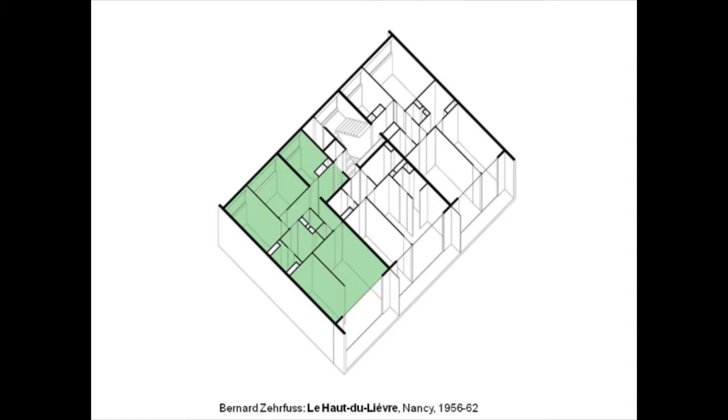Now, Frida and Jose, right? A little birdie told me that some of you are flat hunting. If this is so, let me be of some help. I have just the flat you are looking for, with an admirable orientation, well-lit rooms, cross-ventilation, and no inner patios. What more can one ask for? The flat I have to offer you has 3 bedrooms, with no space lost to corridors, and a generous balcony.

Wouldn't you like to live here? Frida? Yeah? Yeah, Jose. Yeah, well. Now, let me show you what your building looks like.

And here you have it. A housing estate in Nancy, France, by the French architect, let's see, Bernard Zehrfuss. Yeah, I don't know, this is not French. He's one of my French students. Well, thank you. Well, Bernard Zehrfuss, containing 3,388 dwellings, based on the aforedescribed rationalistic criteria. Flats capable of housing all the students and all the teachers from this school and many, many more. We could live together. Well, this block is 400 meters long, and it's one of the longest blocks of flats ever built in Europe.

Would you like to live here, Frida? Yeah. Jose? I don't know. Please say no. Would you like to live here? No. Thank you. Why not? What defects do you find in it? What don't you like about it? Its monotony, perhaps? Do you think it's unattractive?

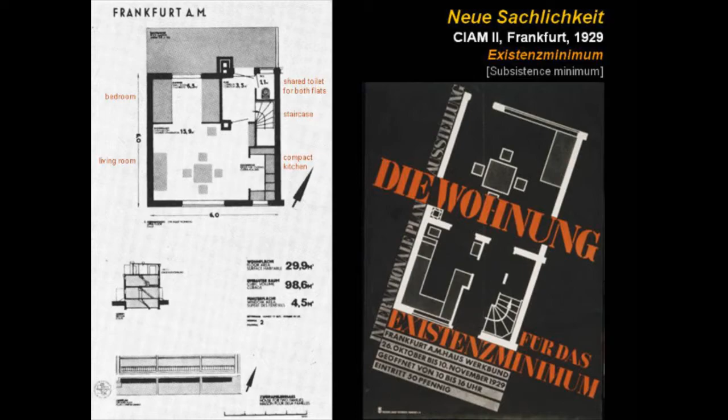As you know, as you should know, at least my third-year students, the block of flats first came into being in Germany in the 1920s, when the economic situation was in dire straits and an urgent solution for the serious housing problem affecting a large part of the population was required. For which, Daniela, where are you? Daniela? Here. For which the architects of the Neue Sachlichkeit, the new objectivity, proposed the concept of Existenzminimum. Existenzminimum. The minimum subsistence dwelling.

In this case, it was 30 square meters. Well, it was an economical proposal which fulfilled the necessary hygienic criteria of the day, and thus ensuring dignity for its dwellers. Dignity. This was the key word. This economic and efficient solution was defended by the architects of the modern movement.

And following these examples, the housing block spread with great success throughout Europe during the 50s and the 60s. Some with better luck, others with worse. Your flat, Frida, that is the one I am about to sell you, is just an example of these blocks of flats. And you must remember that this housing block concept was the solution to the precarious housing problem that many people were suffering. And I have a shocking image now.

Now look, this is how people lived in Calle Riera Blanca, in shanty towns in the 50s, in the heart of Barcelona. For example, the very same French precast concrete panel company we saw in Nancy built blocks of flats in Bellvitge and L'Hospitalet, along the lines described before.

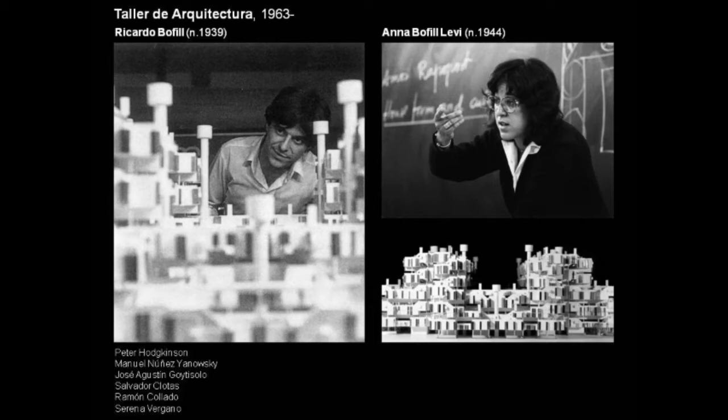It was in this context that the young Catalan architect Ricardo Bofill led a group called Taller de Arquitectura, or the Architecture Workshop, which proposed bold solutions in order to overcome the inherent banality of the block of flats. Taller was a multidisciplinary office where architects like Anna Bofill Levi, Ricardo's sister, Peter Hodgkinson, and Manuel Núñez Yanowsky worked side by side with the poet José Agustín Goytisolo and the manager Salvador Clotas.

It was Anna Bofill Levi, the poet José Agustín Goytisolo, and Manuel Núñez Yanowsky who devoted most of their time to research new methods to nurture the taller with new ideas, under the firm conviction that a new and better architecture was possible.

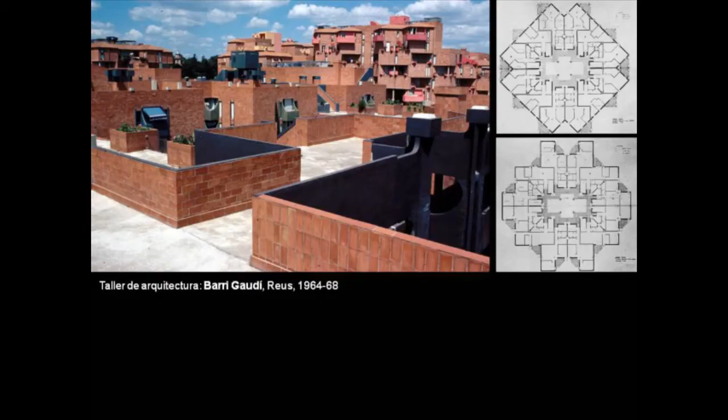Now let's briefly review three projects previous to Walden. In the Barri Gaudí housing development in Reus, using straightforward geometry based on a square plan but rotated 45 degrees and trimmed, volumetric variety and an interesting series of terraces are generated.

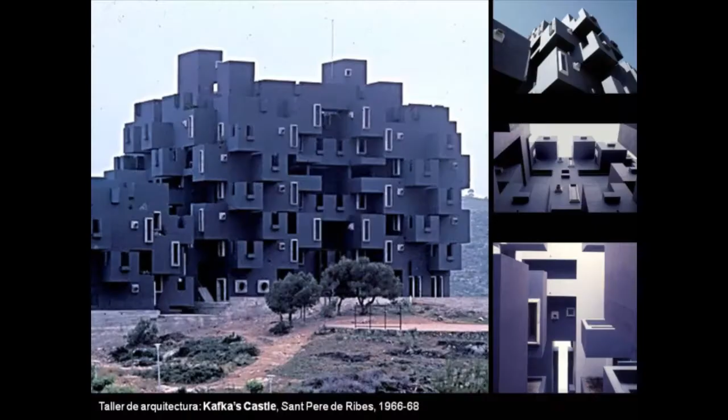In Kafka's Castle, in Sant Pere de Ribes, near Sitges, the housing modules are arranged in a helical form that reminds one of Safdie.

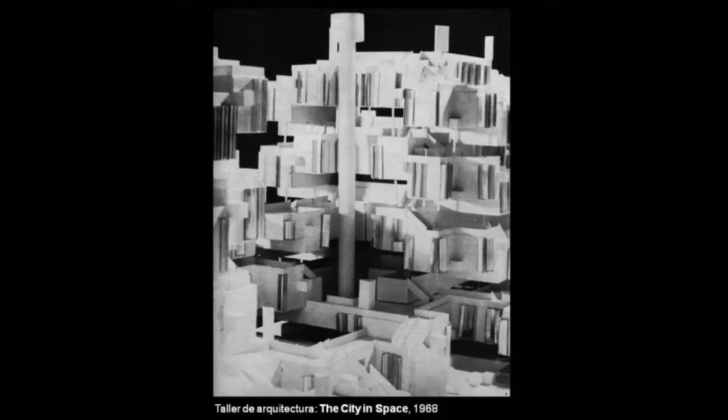Now, Taller defended a utopian metropolis, what they called the city in space. Till then, cities had grown by means of high buildings, garden cities, or blocks of flats.

Instead, the city in space would be based on spatial grids that included all the basic elements of urbanism, intermingled all urban activities, and at the same time allowed maximum flexibility so that when society changed, the city could also transform itself. An attempt to apply these proposals in Madrid eventually failed, and the project did not happen over there.

It would be in Sant Just Desvern, just outside Barcelona, where Taller got its opportunity to implement the principles of their city in space, in a plot occupied by an old factory. Several buildings were planned, but finally only two were built. One was the Taller's future studio, and the second, the residential building that we are going to talk about today,

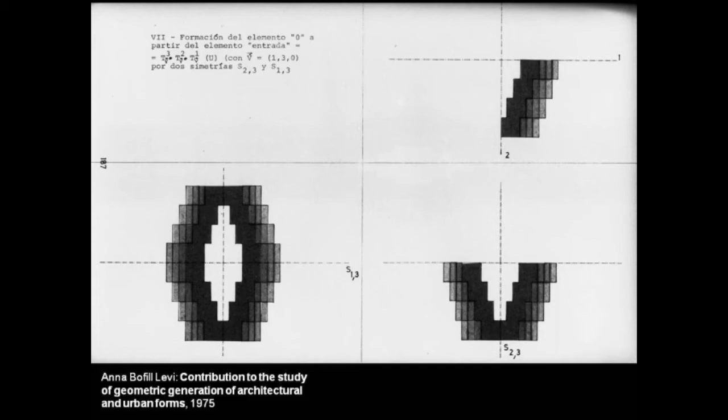Using mathematics — I know you love mathematics, particularly Fabel and Mate — the thesis sets forth from a single cell to study the systems of association producing complex textures. For example,

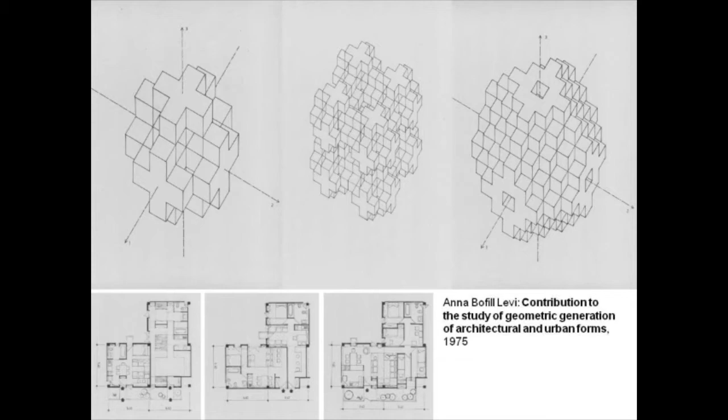her thesis proposes various types of L-shaped dwellings with their three-dimensional clusters, resulting in buildings, groups of buildings, even neighborhoods. In other words, cities in space.

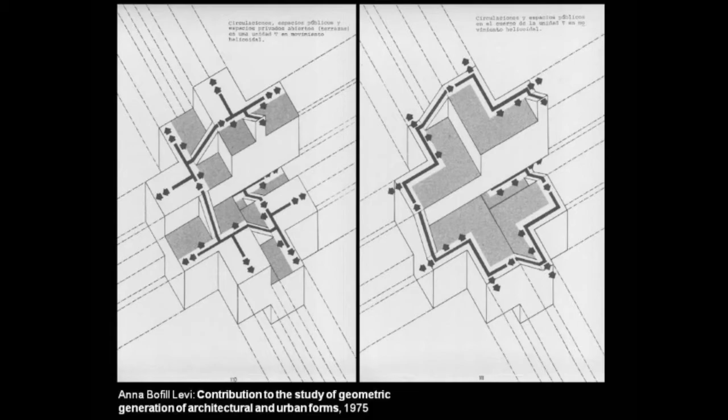And circulations between the different pieces are contemplated. Remember the Barri Gaudí in Reus. Now here, the linear development of a core and the generation of a street can be seen.

But now, pay close attention to the next drawing we are about to see. Notice how, while Anna Levi was writing her doctoral thesis and Walden was being designed, she applies this same geometry you see here to another project she had at hand. Now look.

The work in question is Esclat — but it's not a building. No, it is a piece of music written for nine instruments. Anna Levi not only has a solid education in mathematics, but also one in music.

In fact, her musical vocation predates her passion for architecture and has been nurtured with lessons given by composers such as Iannis Xenakis. She usually organizes her musical work graphically.

That is to say, we see how her doctoral thesis connects architecture, urbanism, and also music. And how is that possible?

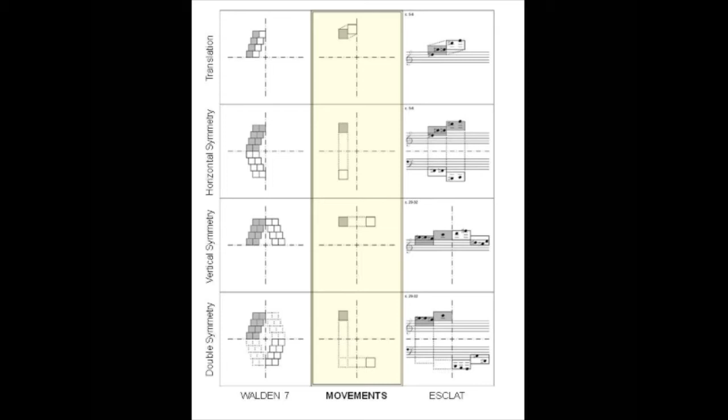Geometry — I know you love geometry, yes, descriptive geometry, one of your favorite subjects. But geometry is the backbone of it all and is used with a parallel logic in organizing both forms, that of the Walden 7 building on the left here and the musical piece Esclat on the right.

The dissertation explores the possibilities of applying basic movements. And here you have them, from top to bottom: translational motion, horizontal symmetry, vertical symmetry, and double symmetry.

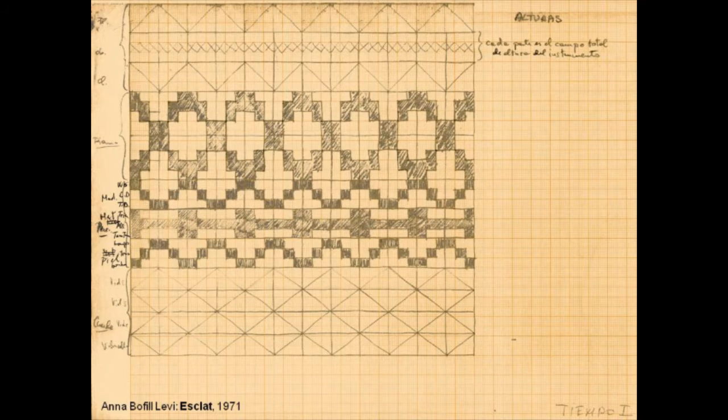Now, going back to the musical piece Esclat, and before we listen to a tiny fragment from it, I propose that we try to understand how this musical piece is graphically organized. And don't panic, because I'm going to help you.

Remember, the piece has 9 instruments, but now we are going to focus on the piano part. The horizontal axis represents time, and as we move to the right, time lapses. The vertical axis indicates the register, the sonority range, the pitch of each note.

I know some of you don't understand this concept, so I have two examples. Let's hope we can listen to them.

At the top, we have the higher or sharper notes, while below we have the lower or bass notes. Imagine this vertical axis is like a keyboard placed vertically. At the top we have the sharper or higher keys, and below we have the bass or lower keys.

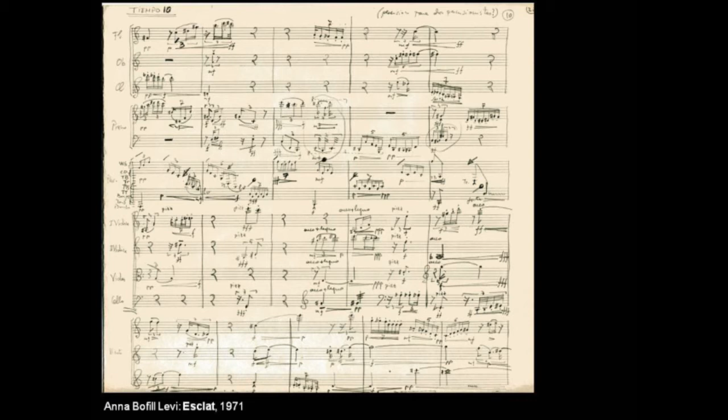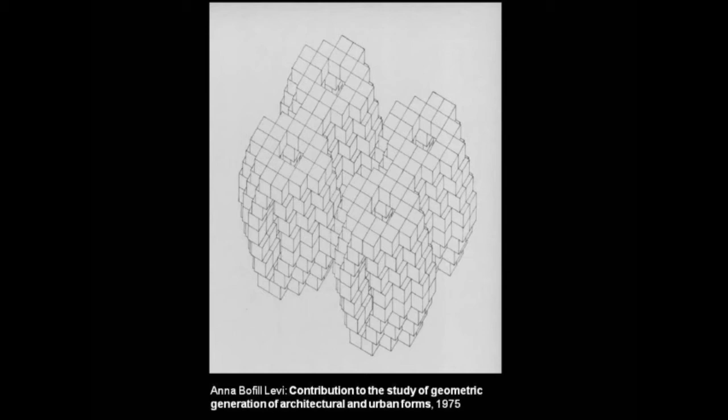Pages from Anna Bofill Levi's doctoral thesis include this volume, generated by a cubic cell with 4 patios containing a fifth central courtyard. This is the scheme followed for Walden 7.

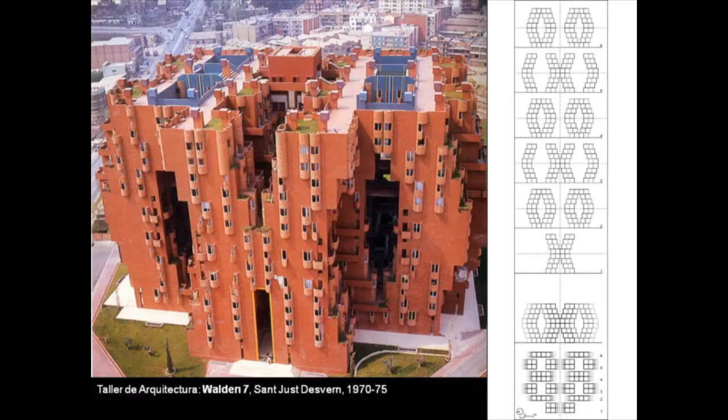Here you see the complex fragmented volume. Cubes are associated following the basic laws of translation and symmetries. As a result, the building acquires concave and convex shapes, while its facade opens out, producing windows of, as they say, urban dimensions—windows of huge dimensions.

Let's look first at one of its modules. Although initially it was considered as a cube, the final decision was to divide the cube horizontally, so we have a duplex, or two different flats, in a cube.

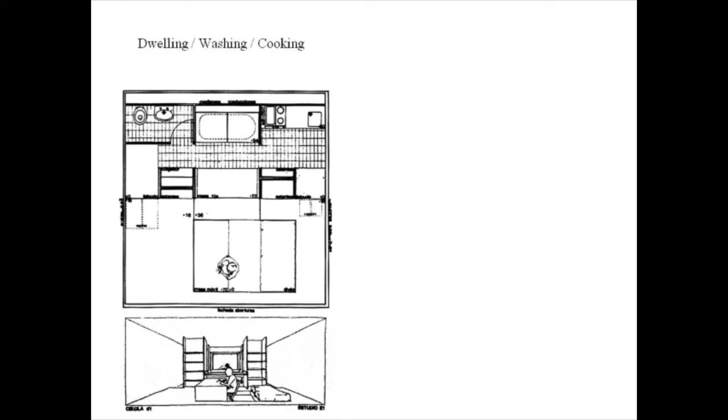The basic module for Walden 7 is a square plan. We have a square where each side measures 5.3 meters, a unit to dwell, wash, and cook in. Curiously, its area is 30 square meters.

Remember? Existence minimum—yes, we have it, but not exactly the same. However, Taller stresses that society has undergone great changes, and this should lead to a new concept of housing.

During the height of Franco's regime in the early 70s, Walden 7 is built with the aim that housing break with previous conventions. This basic unit is in direct contrast with the usual compartmented flat, with closed rooms, with doors.

Notice that here, the main function is to dwell. This concept can be found everywhere, which is why the kitchen is open and forms part of the room.

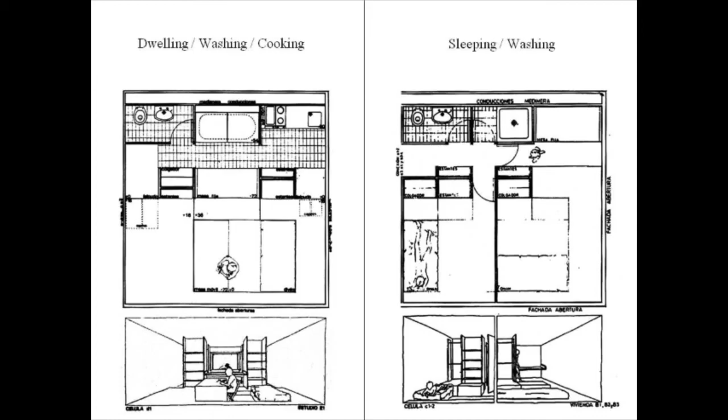The same module can provide spaces for sleeping and bathing. Taller stresses that the individual members of the present-day family require privacy, where they can develop their function to dwell. Thus, each bedroom includes space for dwelling, not just for sleeping, space for dwelling.

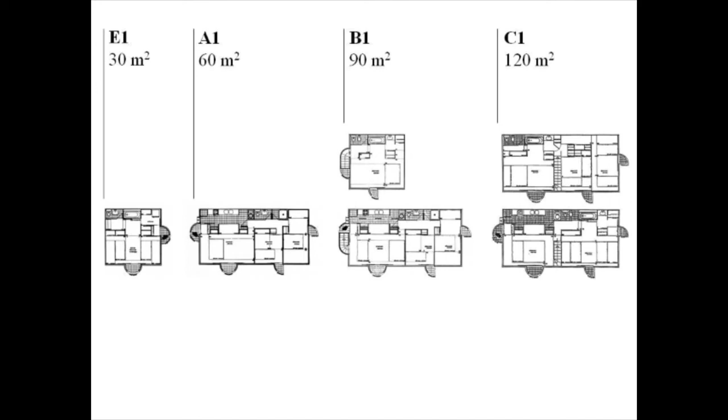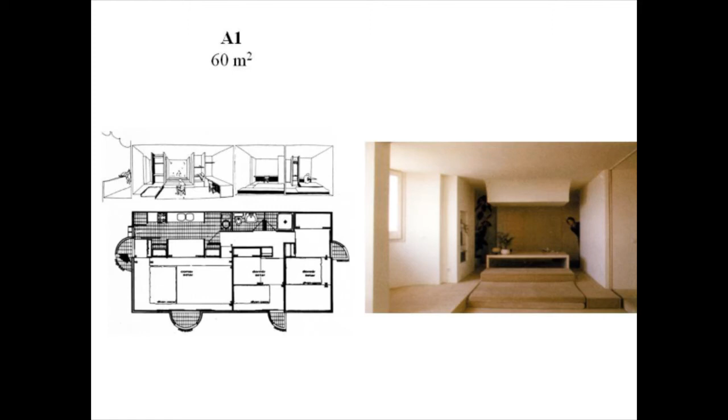Walden 7 offers 4 basic types of housing, based on 1, 2, 3, or 4 modules. We have type E1, the studio apartment we saw before, the basic module of 30 square meters. We have A1, the 60 square meter flat, made up by joining 2 adjacent modules. We also have B1, a 90 square meter flat, made up by joining 2 adjacent and 1 superior module.

And finally, we have the largest flat, C1, a 120 square meter duplex, made up by joining two lower modules and the two above these.

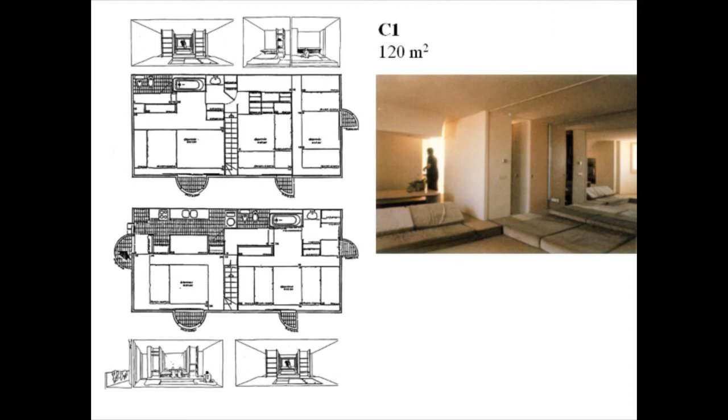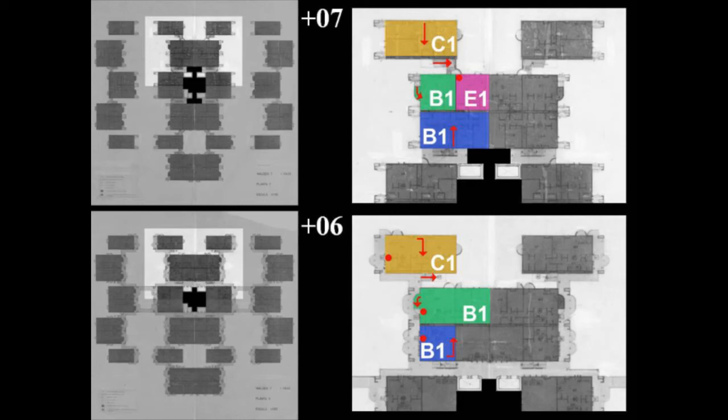Now we get to the 6th floor by lift, and then we continue down the wide corridor to access, let's take an example here, the flat marked here in blue, a B1 type, which has a module on the 6th floor and 2 on the floor above.

Notice the flats in green and yellow here work similarly. However, studio apartment E1 in purple can only be accessed through an outside staircase from the 6th floor. And this configuration allows a flat to be expanded by adding modules to it.

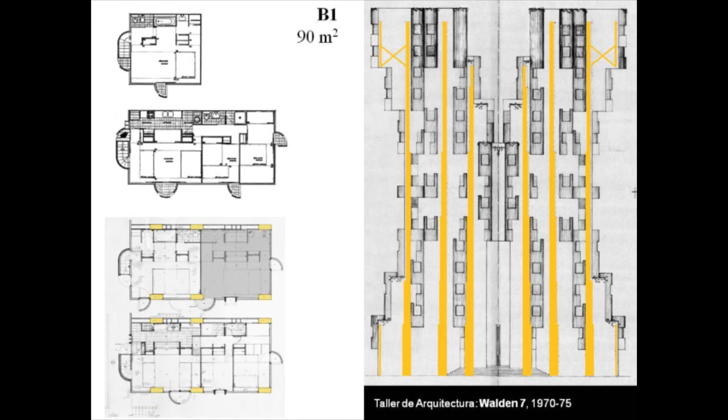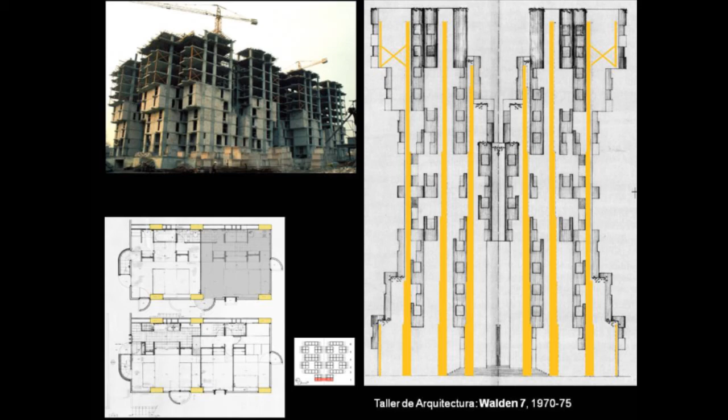Look at this photo of the work in construction. We can clearly see that the pillars are complemented by cross bracing at the cantilevered floors. So this structure undoubtedly conditions the position of any openings or windows.

The building was initially covered with red ceramic tile, the color representing the urban outskirts of Barcelona. However, a year after its inauguration, they began falling off, an incident that has stuck deeply in everyone's mind and always comes up in conversation whenever Walden is mentioned. But remember, it is not always easy to build upon big ideas.

I propose we end our talk by visiting the inside of Walden 7, because the building provides multiple stimulating common areas, because we not only dwell inside or within our homes, but also outside them. Are you ready for the visit?

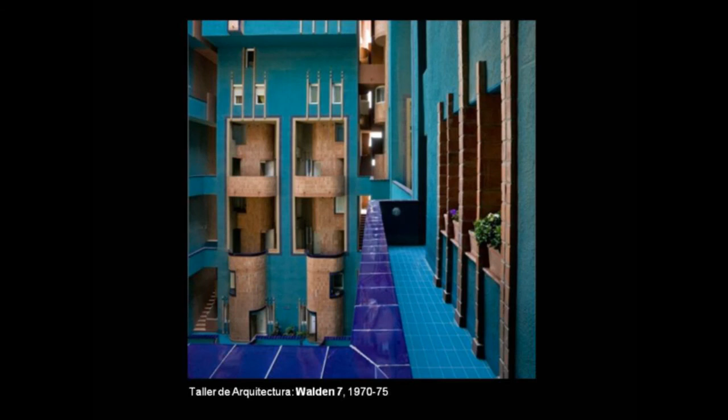This is one of the blue patios, which is best seen as a surrounding three-dimensional volumetric square. Here, we see the perimeter corridors that give access to the flats. And the careful design of these communal areas shows the Taller's commitment to extend the concept to dwell both inside and outside the homes.

The connecting walkways often widen to become viewpoints to admire the stunning views overlooking the patios. Now, notice that usually the word patio conjures up a dark hall with no window. But here,

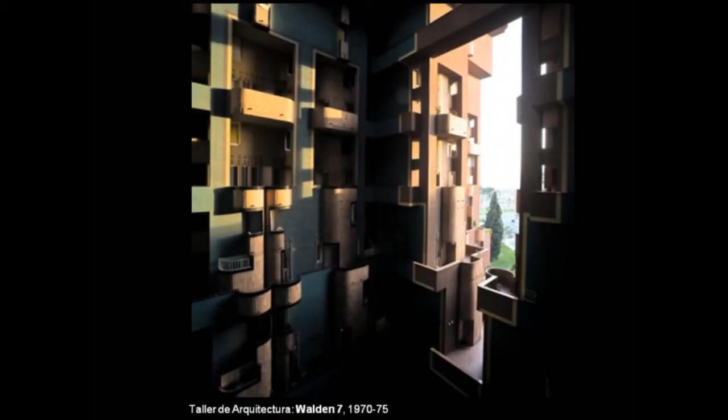these patios are like gigantic protective wombs that open out not only towards the zenith, but also through the urban windows that provide the inside with a generous amount of natural light that is ever-changing, thus contributing to the inner vitality so characteristic of Walden 7.

Without doubt, Walden 7 is a utopia built 40 years ago that still invites us to think what it means to dwell. As José Agustín Goytisolo, the poet of the group, remember, wrote: Walden 7 is a free expansion, like a symphonic score open to 1,000 sounds.